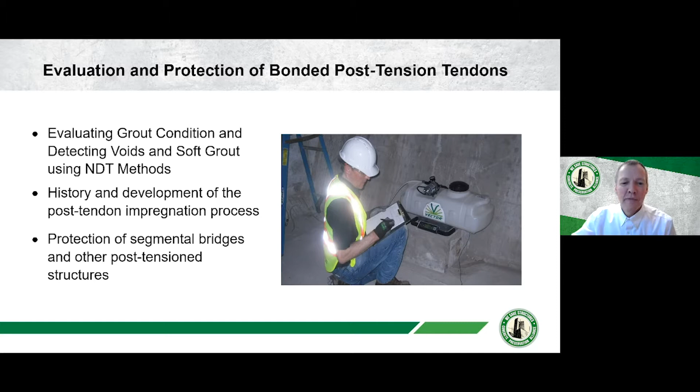Anyway, thanks for the introduction, Scott. Thank you everyone for attending the seminar this afternoon. In the 45 or 50 minutes that we have available to us, my objective is to talk about the evaluation and corrosion protection of bonded post-tension tendons.

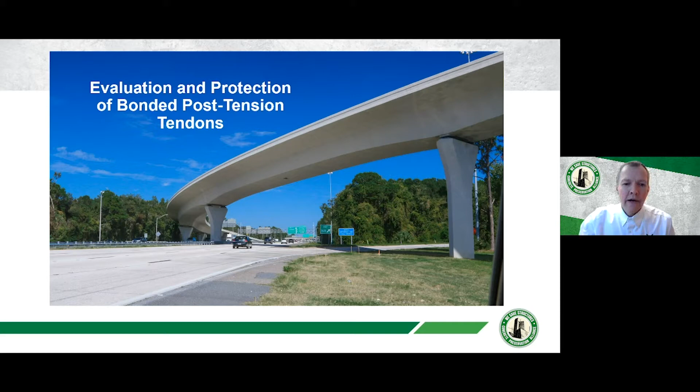I thought I'd start by just showing you a picture of a highway interchange. This happens to be in Tampa, Florida, the I-4 connector interchange. In this photograph, you see 8 or 9 post-tensioned bridges, all as part of the same junction. Post-tension bridges are a very major and important part of our infrastructure and of the bridge network that we have around us.

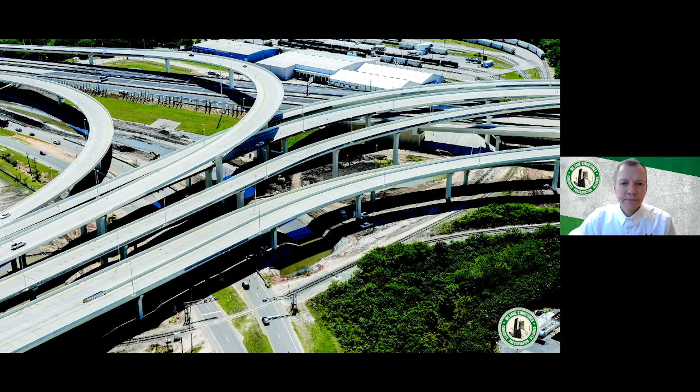Post-tensioning started a number of years ago. A man named Eugene Freyssinet first proposed the use of post-tensioning in 1928. He did a number of experiments and worked on building elements and some beams. But by 1941, the first post-tension bridge was built, and it was built in France.

After the Second World War, there was an increase in popularity of post-tensioning, and part of that was driven by the steel shortage that existed. Post-tension structures more efficiently use the steel that's in them, and that was one thing that helped drive its use.

The first post-tension bridge in the United States was built between 1949 and 1951. It's in the Philadelphia area. The bridge has been rehabilitated, but it still exists today, and overall these structures have been very durable and have served their purpose very, very well.

Post-tension bridges are structurally efficient, and post-tensioning has made long-span bridges more practical and, I would say, generally more economical than they were before.

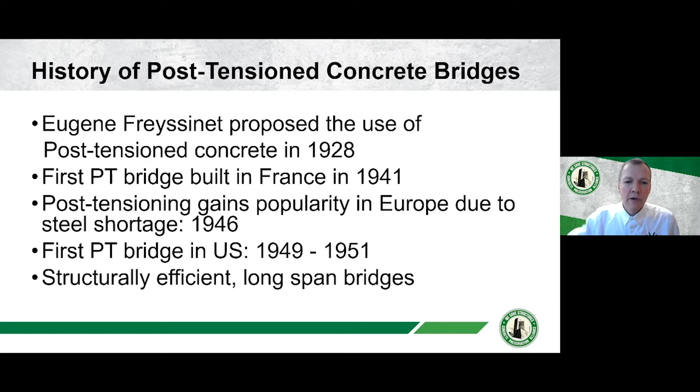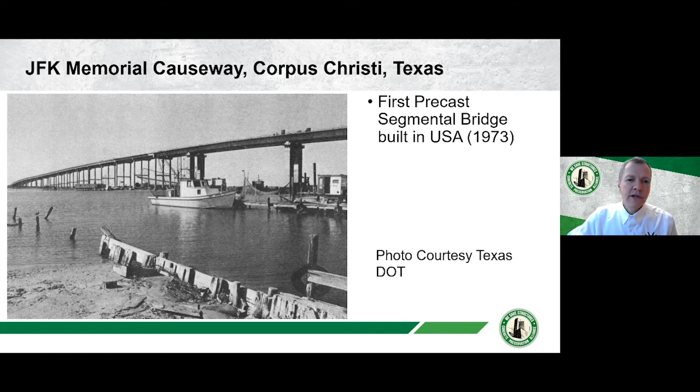One specific type of post-tension bridge that is quite common, and you'll see in a few of the case studies, are segmental, precast segmental bridges. The first one of these built in the United States was built in Texas by Texas DOT in 1973 in Corpus Christi, as you can see here. And that bridge is still in service as well.

I had the privilege of being able to inspect that bridge along with the then chief bridge engineer for Texas DOT, and generally this is in really good condition. It has one kind of issue, a detail that they probably didn't know about at the time when they built the bridge: the end anchorages for the post-tensioning actually come up and end in the deck slab, so the anchorages are somewhat sensitive to getting contaminated with water, because the anchor pockets end in the deck. Other than that one issue, the structure has served its purpose very well and has been in good condition.

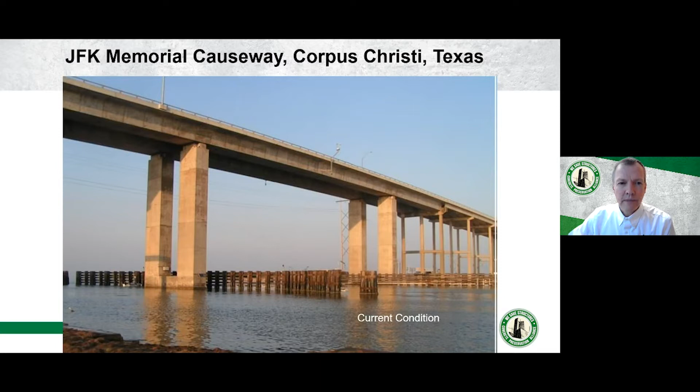Now, if we talk about the durability of grouted post-tension structures, corrosion and durability really come down to the quality and uniformity of the grouting. If the tendons are well grouted without any voids and the quality of the grout is what it should be, you very rarely will see any corrosion issues.

The photograph that you see in this slide—an opening has been made in the side of the concrete to expose the duct. You can see the metal duct has been opened, and inside it the grout has been removed to expose a couple of strands in this tendon. You can see that the strands are in good condition. They've been embedded in good quality grout, and there's no sign of any corrosion activity. This is what ideally we would like to see everywhere.

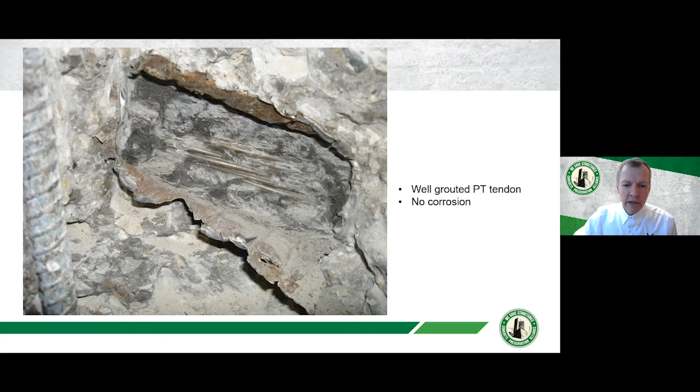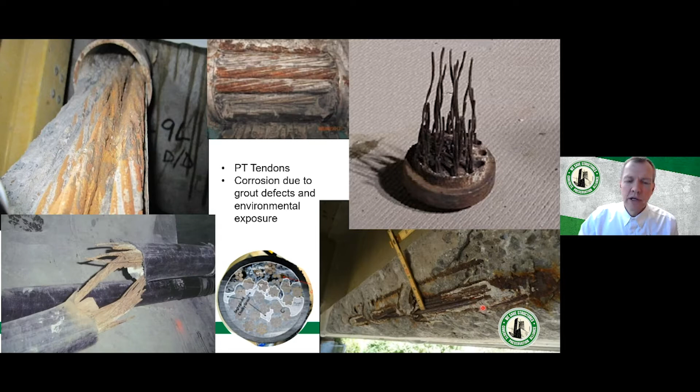In the bottom right-hand corner, we have an example of a structure that is exposed to chlorides in the environment. This one happens to be a Pennsylvania DOT bridge, and chlorides have soaked through the concrete, gotten down to the metal duct. They've corroded the metal duct entirely, and you can see that the strands inside of the duct are now corroding.

There are many reasons why you can end up with issues that result in corrosion, but I'm going to just touch on the two most common ones.

The most common, in my experience, is the presence of voids. If you have a void in your grout, then you have a location where the steel may not be protected. You have a location where water can collect, and even worse, salt water can collect, and you can have severe damage and corrosion in the areas where you have voids.

One of the common things that leads to voids is what is referred to as bleed. If you have a standard cement water grout, in order to make it pumpable, you actually have more water in the mix than what is required to cure the cement. The result is that after the cement grout is pumped, some of the excess water will essentially float or bleed to the top, and this will end up leaving a void after it either evaporates or is absorbed into the remainder of the grout.

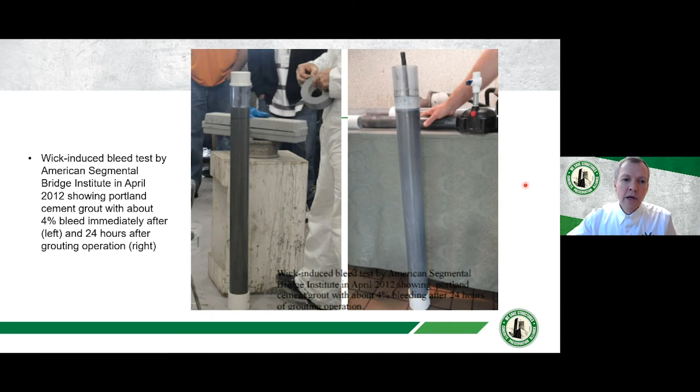So this is one issue that can lead to problems: voids. Another issue that definitely can lead to problems is if you have segregation, or sometimes, in extreme cases, what's referred to as soft grout.

A lot of agencies have moved from using cement water grout to using prepackaged grouts. These grouts have additives to prevent bleed or to greatly limit it, and that's good. But if you add too much water to those mixes, or in some cases the bags are a little bit old, you can have segregation occurring.

That's simply a separation of the material based on density. You'll have denser material at the bottom of the duct, and the lighter material will float to the top. You may not have any voids at all, but you'll have differences in material properties that can lead to corrosion. Generally, the strands in the good quality grout at the bottom will be protected, and the strands in the lower quality grout that floats will typically corrode.

One of the things that drives that corrosion is that where you have the higher water content grout, you tend to have a concentration of water soluble salts like chlorides and sulfates, and you'll end up having a concentration cell, where the strands with higher sulfate and chloride content will corrode relative to where you have lower concentrations. That's something you should be aware of.

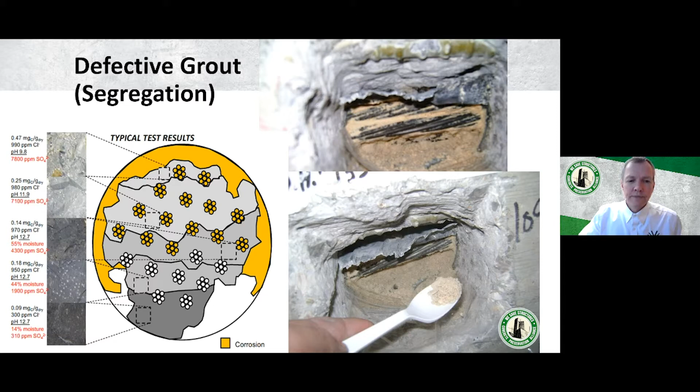This equipment is basically doing impact echo and pulse velocity concurrently. If you move along a tendon assembly, you can pick up where you have voids or defects in the grout. The video here will probably show this a little bit better.

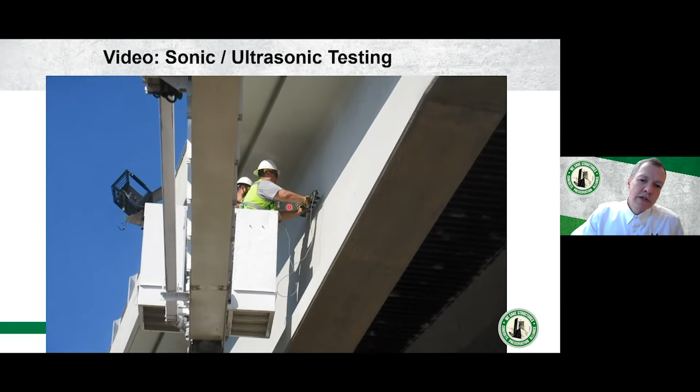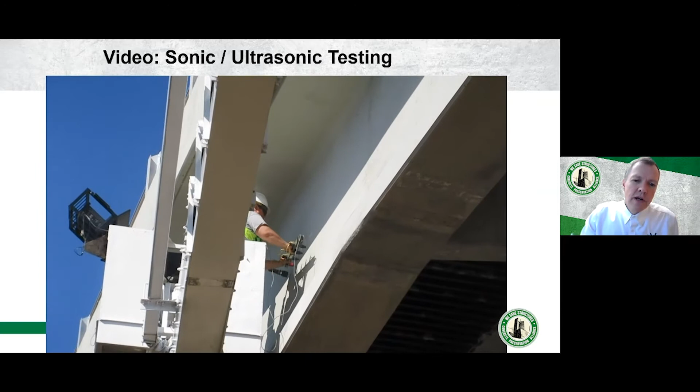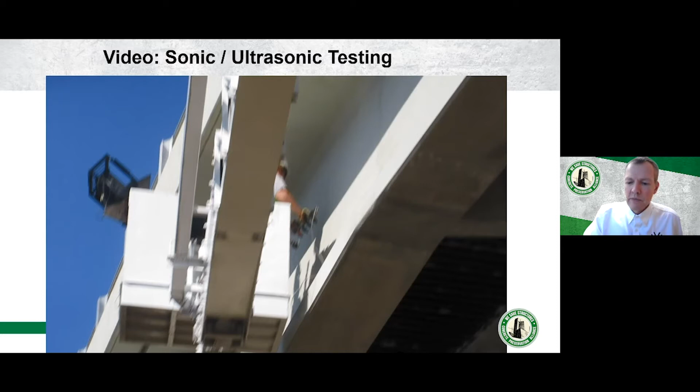So here are a couple of people in a man lift, going along and taking measurements running along the line of the tendon. The person on the left is using an impact device that has a precision impact on the concrete, and the sensors on the right are collecting the impulse response from that impact along the line. If you move along the tendon in this way, you can pick up very easily where you've got problems and where it does not appear like you have any.

Just an example of that: this is a picture of a bridge. It's a small pedestrian bridge over a section of expressway out on the west coast. The DOT was concerned - they had reviewed the construction records and thought that maybe they had some problems with the grouting on that post-tension pedestrian bridge. The people in the basket here are doing the same testing you just saw in the video, and they identified a couple of areas where there were some big anomalies. Those areas were opened up, and you can see here that in this section there was no grout at all. That was identified using the sonic ultrasonic testing technique and equipment.

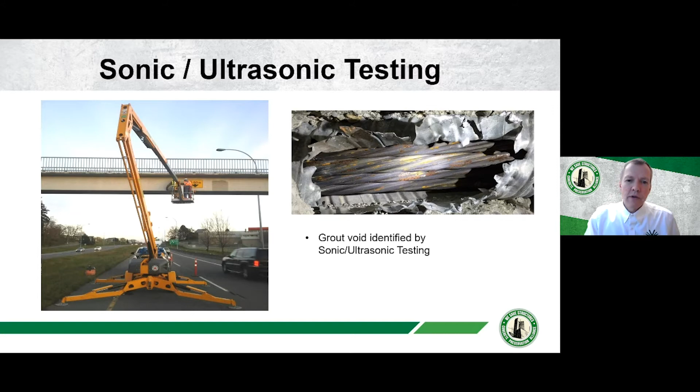So if you identify an anomaly with this equipment, one option is that you can chip the concrete, make an opening, remove the duct, and take a look inside. In some cases that's the appropriate route. In other cases, you might not want to make that big of an opening in the concrete, so you may want to use a borescope.

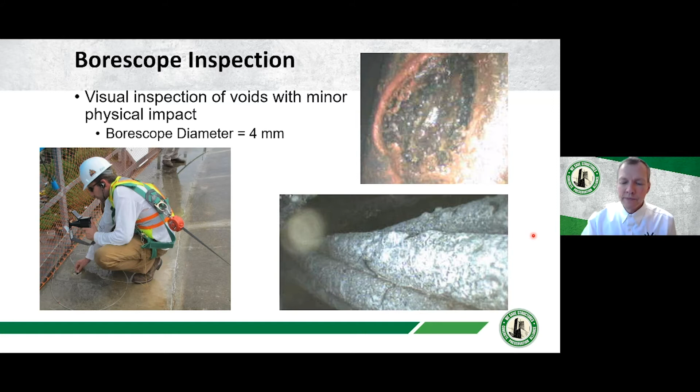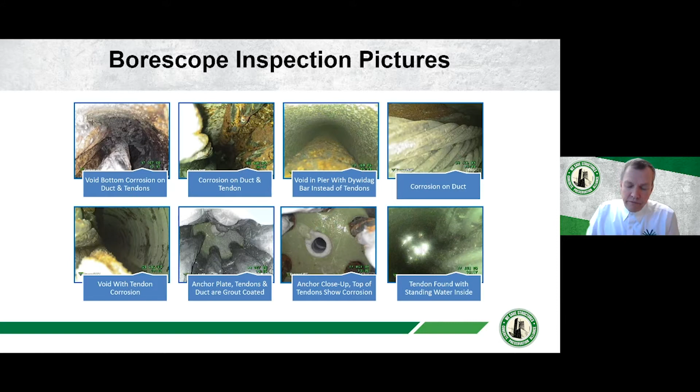Similarly, you can do this on other projects. This is a different project on a different bridge, and you can see different borescope images taken from different defects that were identified - holes drilled in, and then the borescope used to determine the condition of the strands, as well as to get an idea of how big the void is. This gives you a way to verify in the field the non-destructive testing results that you're getting from the sonic ultrasonic techniques. So if that's something you want to do, it's available and certainly possible.

There are cases where you may want to know the condition of the strands themselves. It may be grouted, you may not have any presence of voids, or you may not be aware whether there are or not. There is a technique available using magnetic flux that can be used to determine if you've got broken PT tendons, or more likely broken individual strands or wires.

I'm just going to show you a slide or two from a project that we did on the Sunshine Skyway down in Florida. The post-tension tendons in question here are transverse post-tensioning that's in the deck of the bridge.

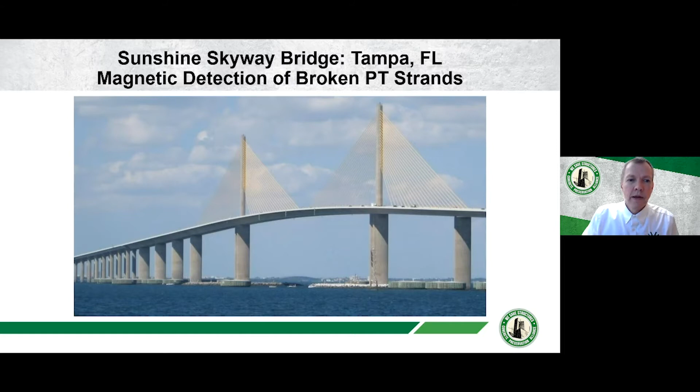The left-hand photograph shows the equipment that was used. Essentially, this is a large electromagnet. You've got one pole of the magnet here, and the other pole over on the other side, and this large magnet creates a magnetic field between the two poles.

When you run this over the concrete surface and over a post-tensioning tendon that runs in the same direction as the magnetic field, you induce a magnetic field response onto the steel. You're magnetizing the steel, so one end becomes magnetized south, like the magnet shown here in the center, and the other end becomes magnetized north, as indicated here.

If there are no breaks, if everything is continuous in the steel, you'll end up with a magnetic field curve that starts either high or low at one end - so high here like south - and comes down smoothly, like an S-curve, all the way to the bottom right.

If the tendon is completely severed, you'll end up with two curves. You'll have south going all the way down to north, then you'll start with a new south, and come back down to north if it's completely broken, as illustrated by the little bar magnet in the middle here. More likely, only a portion of the steel is broken.

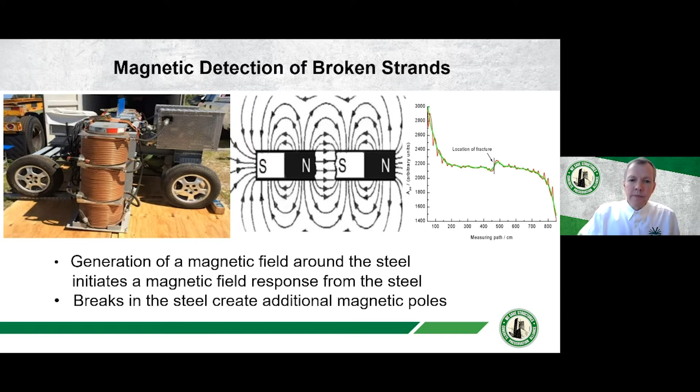Okay, so now I want to talk a little bit about corrosion and techniques that can be used to determine the risk of corrosion activity inside grouted post-tension tendons.

You saw the photo on the left at the beginning of the presentation - it's clearly a situation where there's a void in the grout and exposed steel strands in that voided section. These exposed strands are subject to potential corrosion, and their behavior will be something like what's shown on this graph on the right: the corrosion rate is really low if there's little moisture, then it increases, and once it starts to go, it goes up very, very high.

For a standard temperature condition, you'll get a single curve like this. If you have multiple temperature situations, you'll get multiple curves, but the point of showing this is just to give you the idea.

If the strands are in grout, the grout creates an alkaline environment around the steel. That alkaline environment protects the steel from corrosion, and it doesn't matter whether it's wet or dry - the strands will be protected.

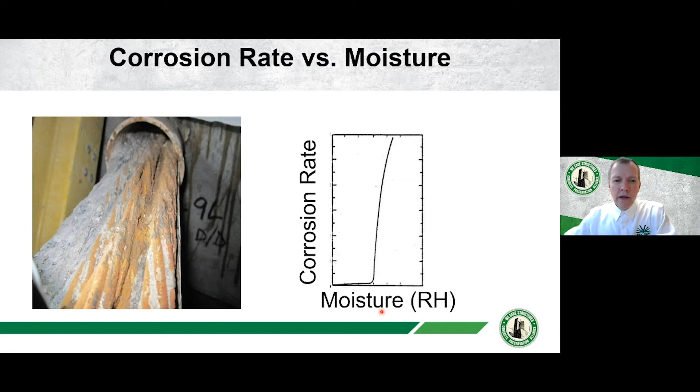Knowing that, we use this relationship in a corrosion evaluation technique we have - we call it PT corrosion evaluation. It's not a very innovative name, but it is a very useful technique.

With this technique, we typically make two openings into the duct. These can be small drilled holes or larger ones, depending on what you want. At one location, which we call the in port, we connect a supply of dry gas along with a flow meter, and push the dry gas in at that location in the tendon.

That pushes an air sample out of the out port, and again using a flow meter, we run that through a sampling or measuring unit to measure the moisture content of the air being pushed out of the tendon assembly.

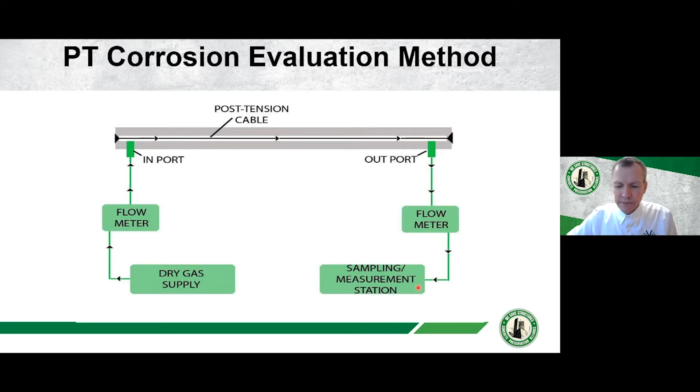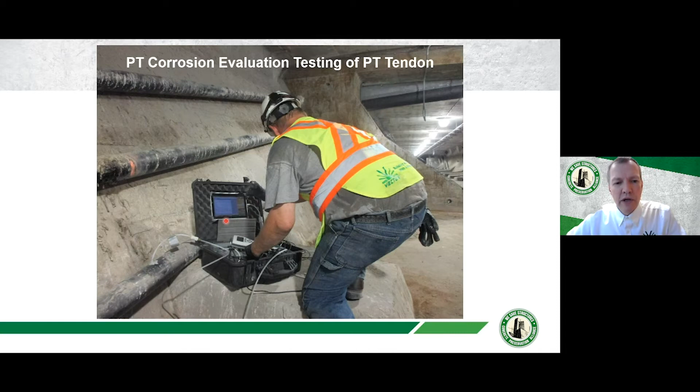This is what it looks like in the field to do this type of measuring. Here you have an external post-tension tendon in a post-tension bridge. Here you can see the outport - it's just a quarter inch diameter, or 6 millimeter diameter, tube that's been installed into the tendon, connected to the measuring equipment. This technician is taking a measurement, and that reading is being recorded and logged in the equipment you see here.

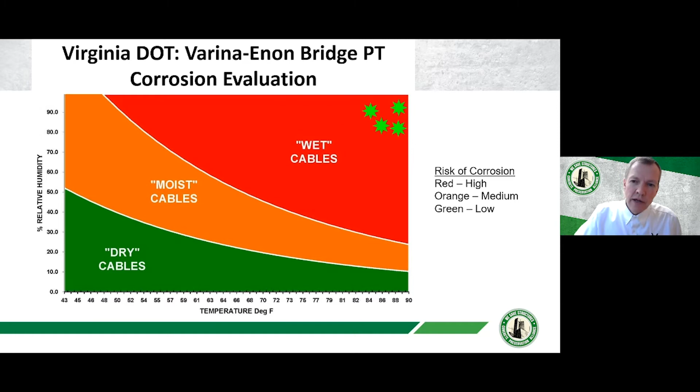So there is a very strong correlation between moisture content and corrosion risk. And if you have wet tendons, one option for reducing the corrosion rate is to dry them out. In the next few slides, I just want to explain the process and show you a couple of pictures from a recent project.

In PT tendon drying, we're using a supply of dry gas. We're pushing it into the structure at some location, either in both directions as illustrated here, or often pushed in at one location and out at another. Either way, you're pumping in dry or desiccated air at a certain location, pushing it through the tendon assembly. It's evaporating or picking up moisture that's in the tendon assembly, and the air venting out is carrying that moisture away. You continue pumping dry air until the moisture content of the air you're pushing out goes below a certain level you wish to have.

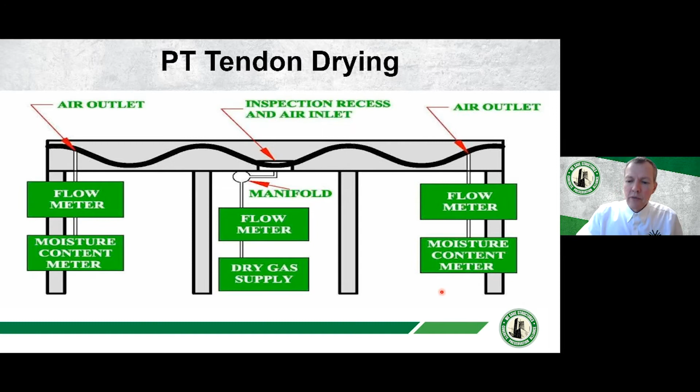This has been done on a number of things. It's a very common technique for unbonded post-tension tendons as well, but in terms of bonded or grouted post-tension tendons, this is an example where it was done recently on a Florida DOT bridge, and the tendons are inside the girders of this bridge.

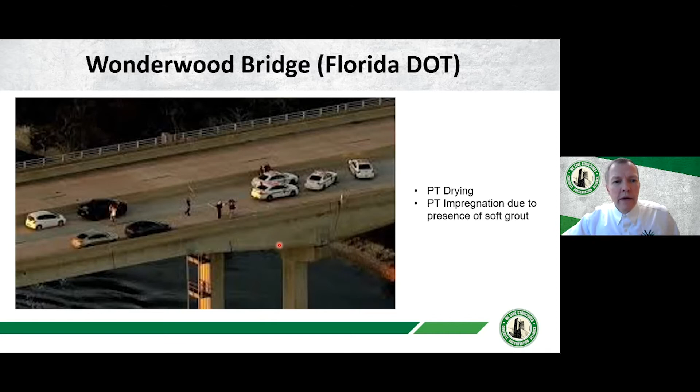If you're going to pump dry or desiccated air through the tendons, this is going to take a period of time, and from a cost-effective point of view, you're not going to do this with a bottle or a few bottles of compressed air or nitrogen. Generally what you'll set up on site is a dry air plant, consisting of a compressor, moisture separator, and then generally 2 types of dryers or desiccant dryers, getting the moisture content or dew point of the air down to usually around -30 at minimum, probably around -40 dew point. Effectively you're going to have air that's completely dry. That air is piped out to the structure, typically split into a number of different tubes, and then injected into the tendons.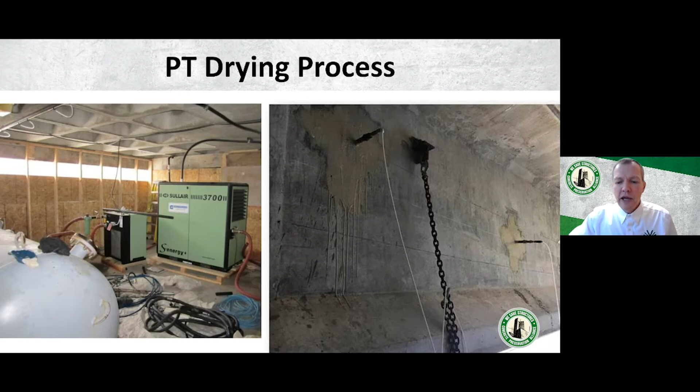You can see a tube going into one tendon, connected to a different tendon down here. You pump dry air in at certain locations, and it vents out at other locations. At the vent locations, you can manually measure moisture content, or as illustrated here, use an automated system to monitor the moisture content of the exhaust air throughout the process. You continue drying until you get the exhaust air down to the level of dryness you wish to achieve.

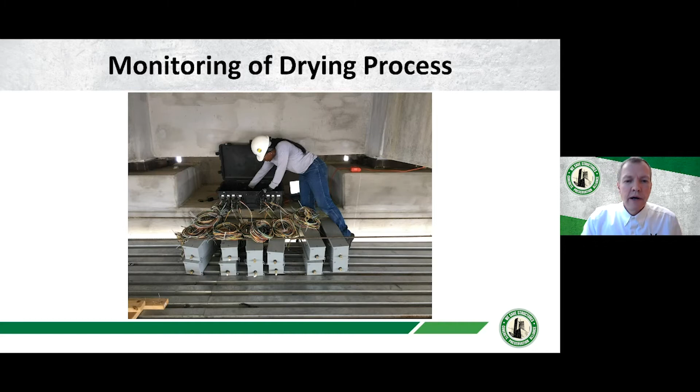So if your problem is simply moisture, you can do drying. If you want to provide protection beyond that, you may want to consider something else, or something in addition. One thing sometimes done in conjunction with drying, or instead of drying, is a process called impregnation.

This is a corrosion protection process for grouted post-tension tendons. Generally these are tendons which have either voids or some type of defective grout. It could be used to provide additional protection to tendons without those deficiencies, but generally this has been used on tendons identified as having these deficiencies.

The impregnation material is transported inside the strands, and it treats the full length of the tendon. I'll explain in a couple of slides exactly how that's done.

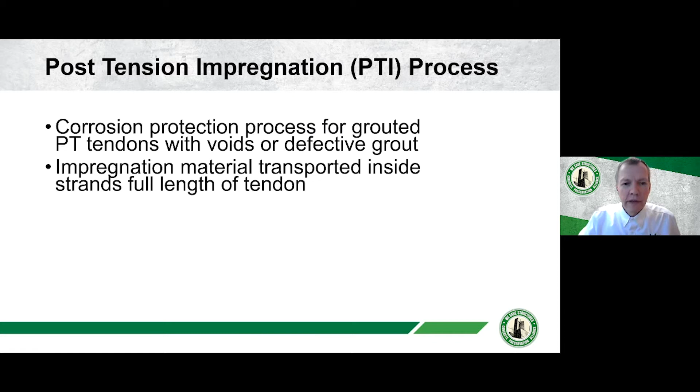The impregnation material reduces corrosion by two mechanisms. The first is that in locations where you have voids and exposed steel, the material will form a coating or film on the exposed steel surfaces. This means exposed steel in voids, but also the internal surfaces of the strands themselves, where corrosion can also be an issue.

The second mechanism is that the material soaks into the grout surrounding the tendon or strand, and by doing so improves the corrosion resistance of the grout. It increases the resistivity of the grout and also makes the grout more hydrophobic, keeping water effectively away from the strands.

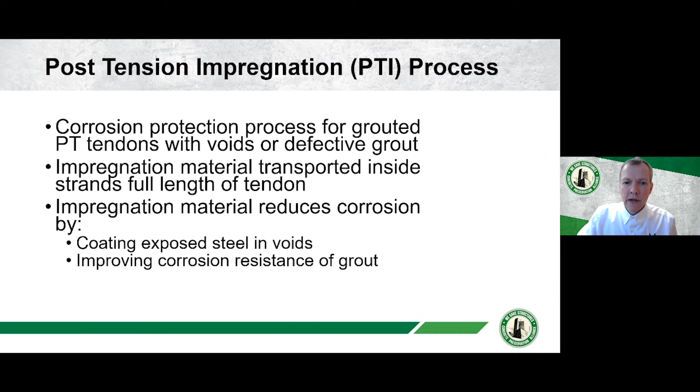Schematically, if the end of the tendon is available, that's a very easy and convenient way to do this. You basically make a connection to the end, pump the material from one end of the tendon, and it travels inside the strands themselves through to the other end of the post-tensioning tendon. As it travels along, the material also seeps between the wires and into the surrounding grout. So conceptually, that's what happens if you have the ends of the tendons available.

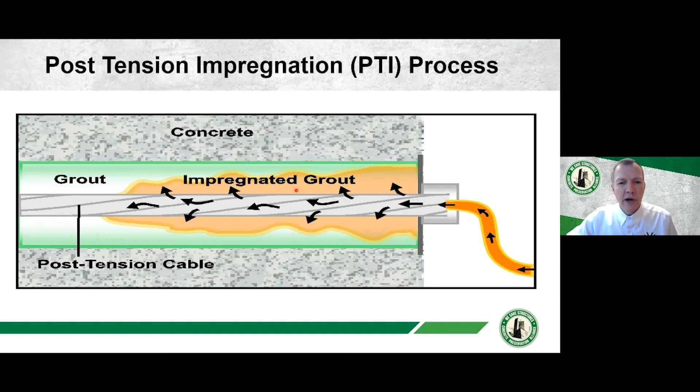If the end of the tendon isn't available, you'll typically do this work from some intermediate location through a port, and the material is introduced there. In these situations, the material generally goes both ways from the intermediate port. Again, the principal transport mechanism is inside the strands themselves, and then from there it soaks between the wires into the surrounding grout.

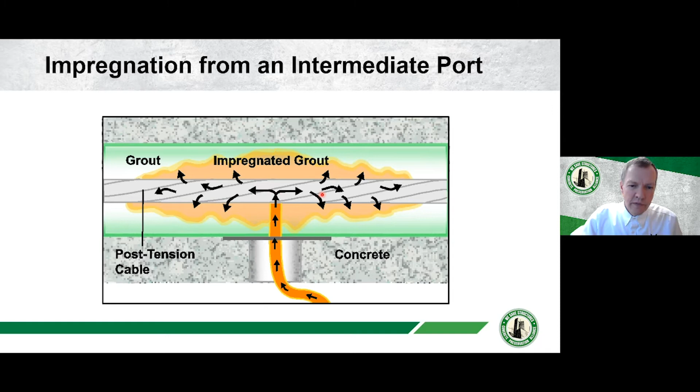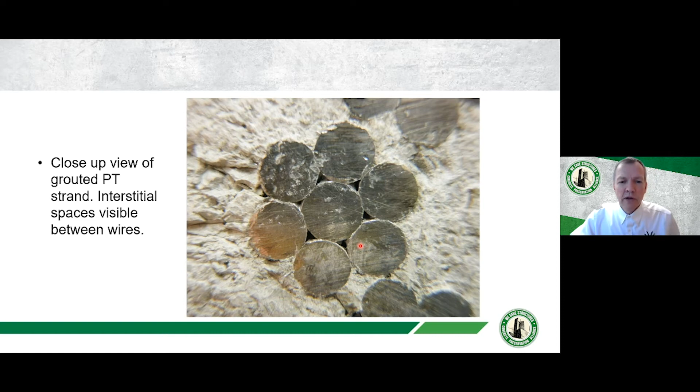If we take a close-up view of the end of one of those strands, you'll see we have 6 outer wires and an inner king wire. In between the wires, we have what we refer to as interstitial spaces—effectively longitudinal capillaries that run the full length of the tendon. That's where the material is primarily traveling, along the length of these capillaries.

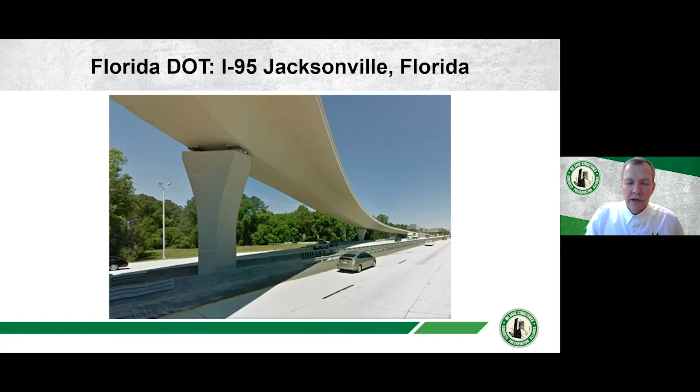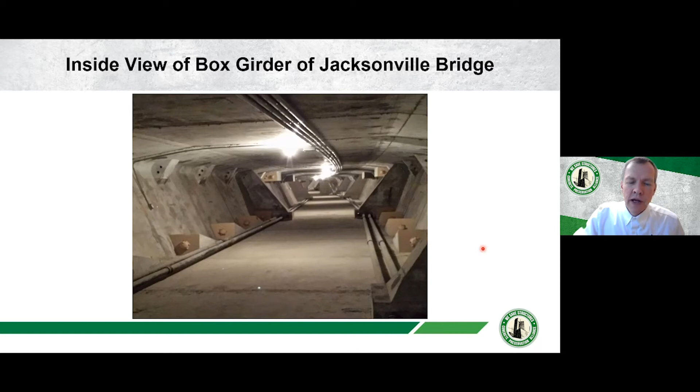Just to give you a few examples, this is a bridge down in Florida—a beautiful segmental post-tension bridge. It has had a few tendons that were not properly grouted, and you can see there are some external tendons and also some internal tendons in this structure. But the ends of the tendons here are readily accessible.

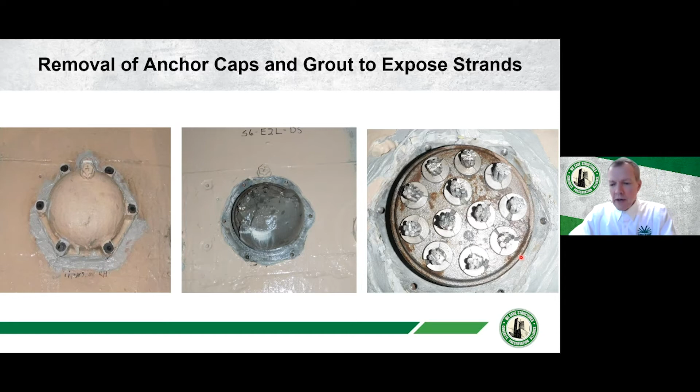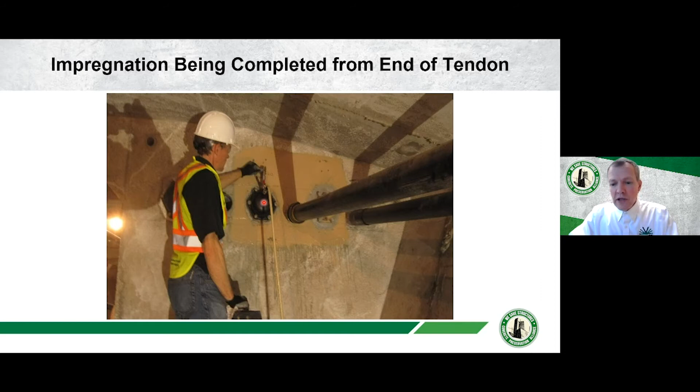There are plastic end caps, and if you have this condition, a simple way to do this is to remove the plastic or metal end cap, expose the grout, remove the grout, expose the end of the anchorage and the end of the strands, put the cap back on, connect a hose to the grouting port, fill the cap with the impregnation material, pressurize it, and then go to the other end of the tendon where you've done the same removal and cleaning, and just wait until the material begins to appear there.

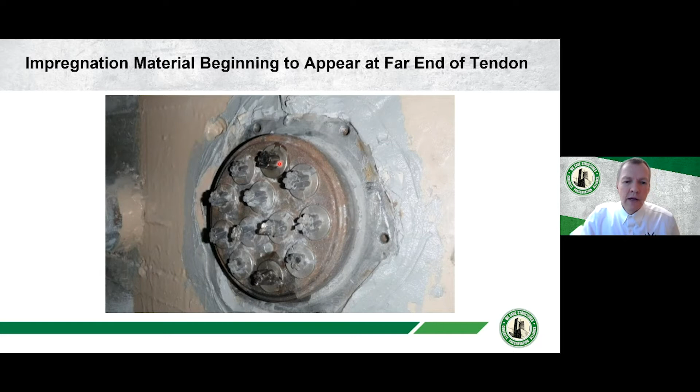And here you can see the material starting to seep out of one strand down here and another strand up here. Continue to wait. And the tendon on the left, I don't think material is coming out of these two strands at the time when the photo was taken, but you continue to wait until the material is visibly coming out of all of the strands at the other end. It's very obvious visually when that's happening and when it's not.

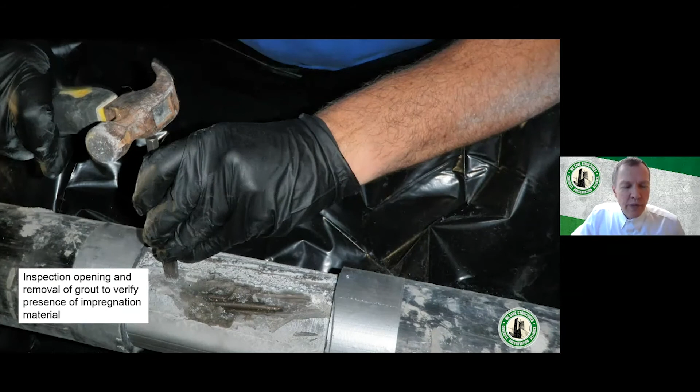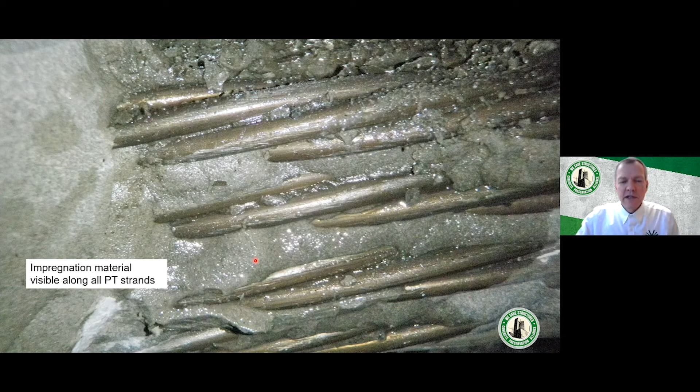That project I just showed you was actually the first full-scale field project that we did for Florida DOT, and they hired an outside consultant to do some quality control inspection. They made some openings in the ducts, 24 of them in the first tendons we did, and removed the duct and carefully removed the grout to verify that the impregnation material was in and around the strands, which you can see in this photograph. They continued the removal all the way around the perimeter and visually verified that the material was present there. They put the duct sections back, regrouted it, and they've never done that again. Obviously those tendons were pumped from one end to the other, but they just wanted to see what was happening at midpoint locations.

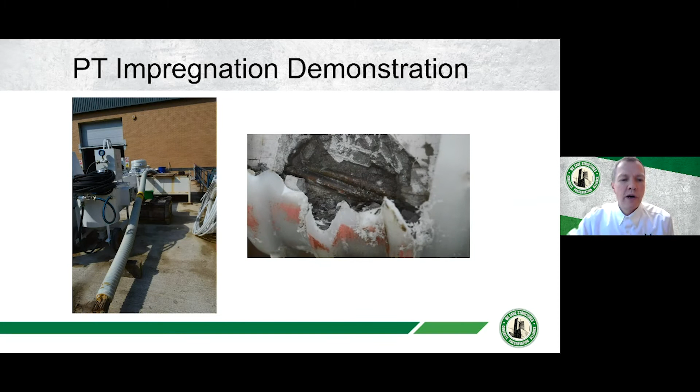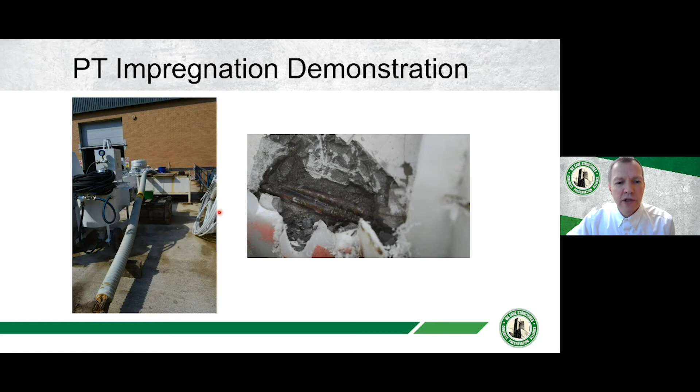In this picture, this is a video from a demo done in the UK. A grouting contractor or PT contractor there had built a tendon mock-up for a grouting verification, and we used that mock-up for doing impregnation. You can see the material, this is an opening somewhere along the length. The material was seeping out from between the wires, and at the end of the tendon you can see the material coming out the end and dripping down, even squirting out a bit. This is only a 10 or 12 meter long length, about 40 or 50 feet, and you can see the flow rate through that tendon is fairly high.

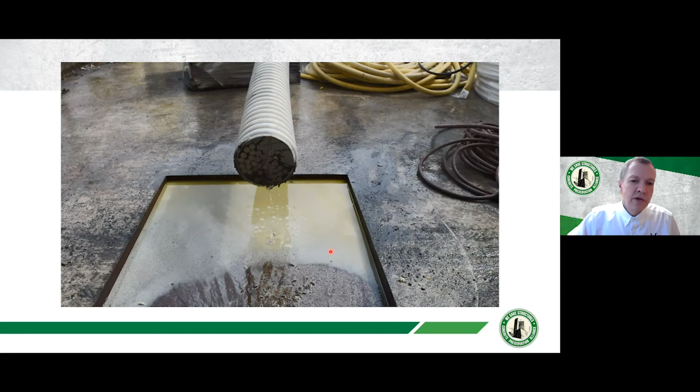In a full length tendon in a bridge, where it might be 200 or 300 feet long or possibly even more, it's still going to flow like this, but just slower because of the longer length.

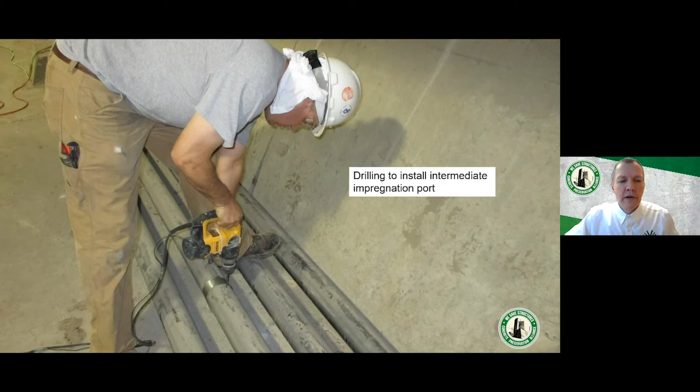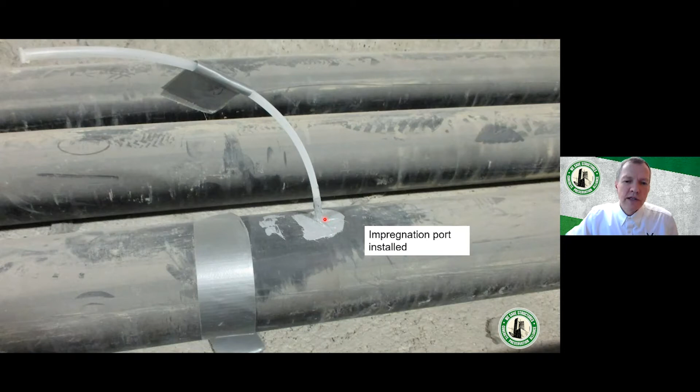The previous two examples showed situations where the tendons were being impregnated from the end. This is one example I wanted to show where intermediate ports were used. Here you can see the technician drilling a port, a 6 millimeter or 1/4 inch diameter drilled hole. We're using special equipment so it doesn't cause any damage to the strands. Here you can see the port installed into the duct, and here's the pump assembly, pumping material from a reservoir down this hose to an intermediate location, and from that location it's pushing the material in both directions.

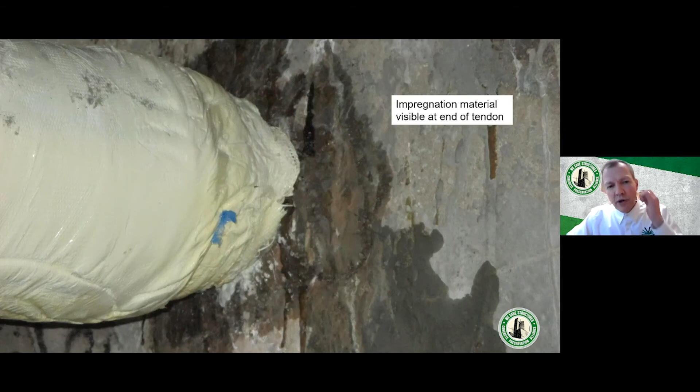When you're pumping from an intermediate location, typically you pump until the material is visibly present at one or both ends. Usually what you'll see is at the end of the duct where it goes into the diaphragm wall, material starting to come out of small cracks in the concrete diaphragm wall. That's one sign the material is there. The other sign is that if you've got a concrete pour back on the other side of the diaphragm, you may see signs of it leaking out around cracks between the pour back and the concrete segment itself. In these cases, the work was done from an intermediate location because the cost and time of removing all the concrete pour back to expose the anchorages was considered prohibitive.

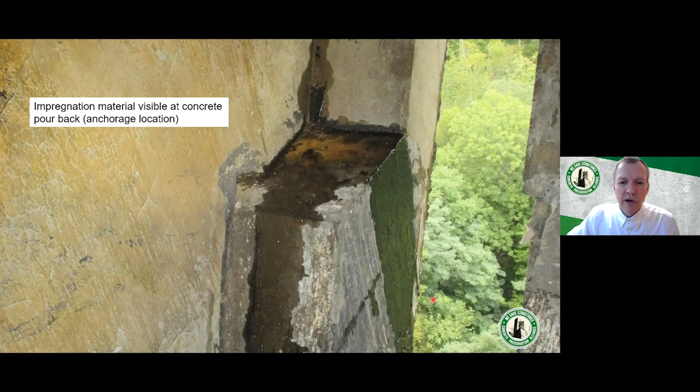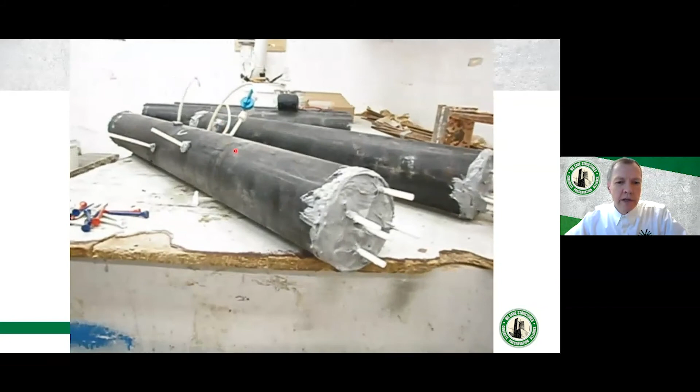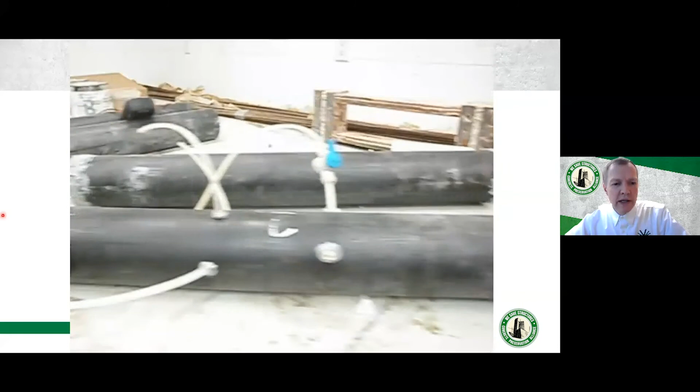Here you can see just one little video from a mock-up: a tendon section with a 1/4 inch diameter, or 6 millimeter, drilled hole in from the side. The valve's opened and you can see the material running out a strand that's running more or less in line with where it's being injected or impregnated. It runs pretty easily lengthwise along a strand once it gets inside.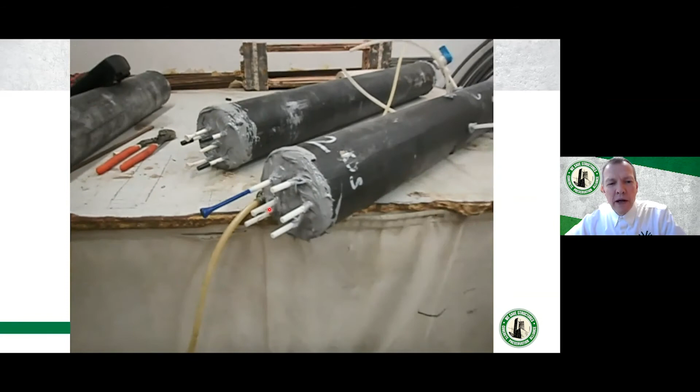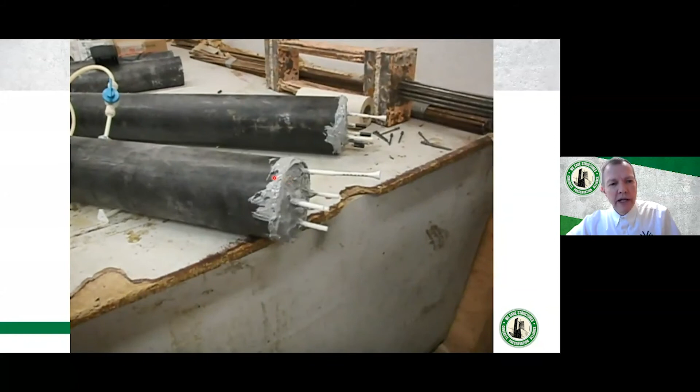Here we're plugging the end of it with a very sophisticated plug to build up some back pressure. This would be typical of what happens when you have a longer length of tendon. When you do that, instead of just running freely along the one strand that is clearly in, you'll notice that it starts to move transversely across the section.

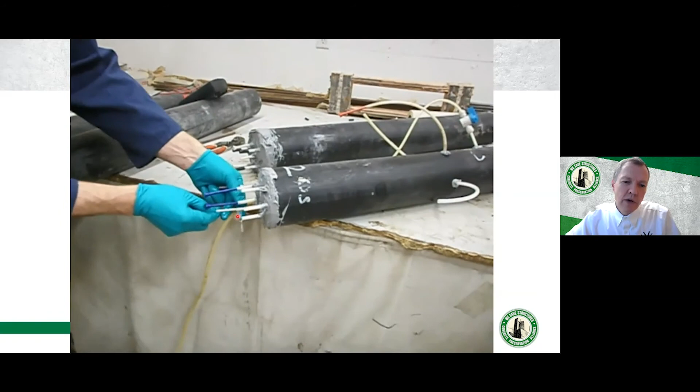So here you can see it's moved 15 or 20 degrees radially around the section. And from the end, you can see it's now coming out below where it was coming before. It's coming out this strand up here and up to the right, and now it's coming out another one down below. Basically it's moving across the section.

The quality of the video here is not the greatest, but you get the idea. Now you can see it's coming out the bottom right-hand one, it's coming out the top right-hand one, and the last one for it to start coming is this one here. And there it goes - it's coming out diagonally opposite from where it's basically being pumped in.

So you can see that the material can travel lengthwise inside the strands, but it also can travel laterally from strand to strand, and that's quite common to see. So that, I think, visually shows you that you can get material into the tendons.

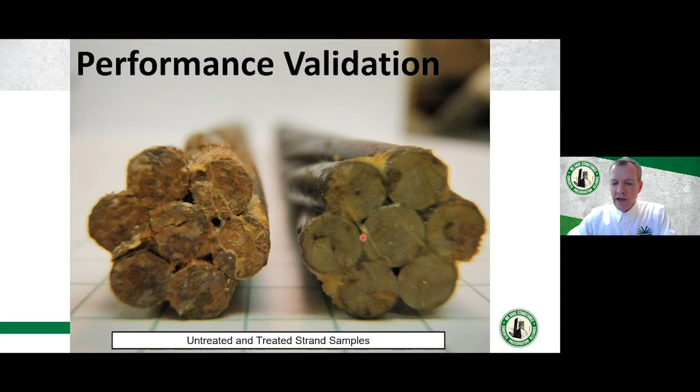If you want more quantitative testing, you generally have to go with either galvanostatic or potentiostatic testing. In a laboratory setting, that generally means making standardized samples with a standard piece of strand, so everything is controlled - the position, the size of the strand, the length of it. That strand is connected to a potentiostat, which is connected to a counter electrode as well as a reference electrode in the cell. You apply either a current if you're doing galvanostatic testing, or a potential or voltage if you're doing potentiostatic testing, and you can compare the corrosion resistance of different things very easily using these techniques.

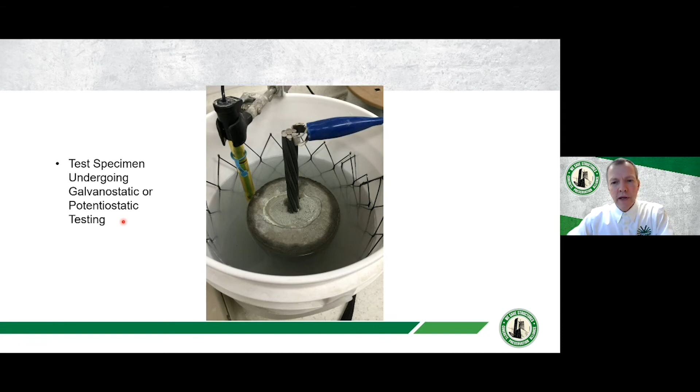So just to not bore you with details - if you want any more information on any of this, feel free to let me know or send me an email after the presentation here.

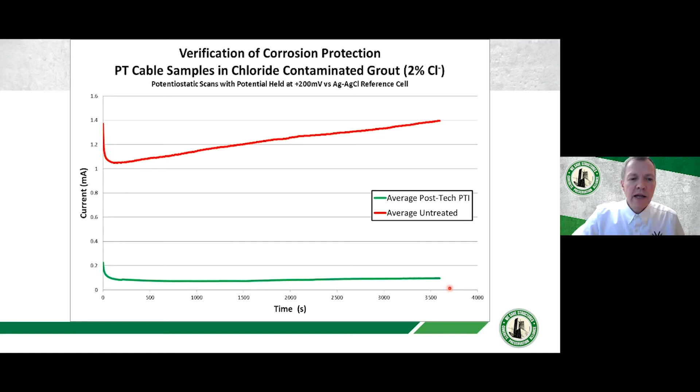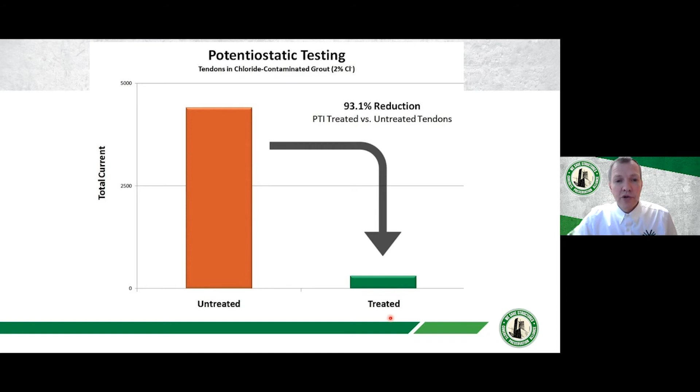You can summarize these charts by calculating the area under each of those curves, and from that you can basically get the total current or total charge passed. You can compare the untreated samples to the treated samples, and you can see there's a big reduction by doing the treatment on chloride contaminated samples in this case.

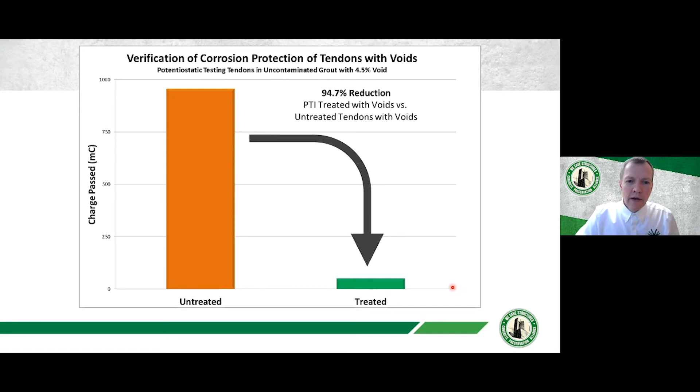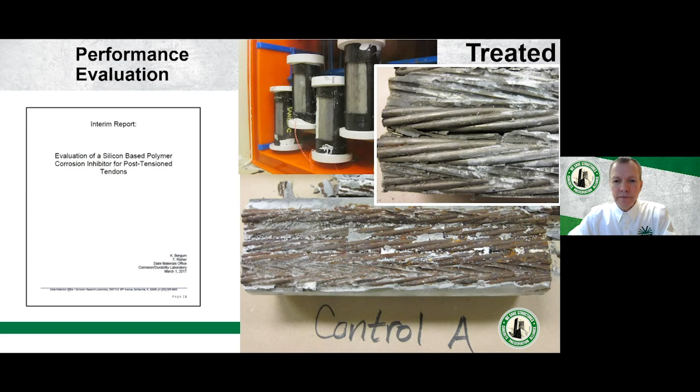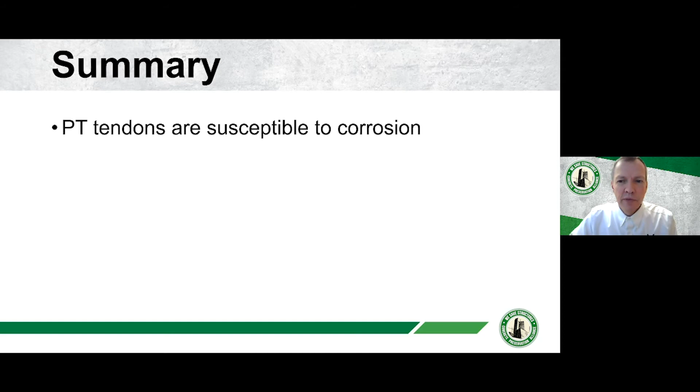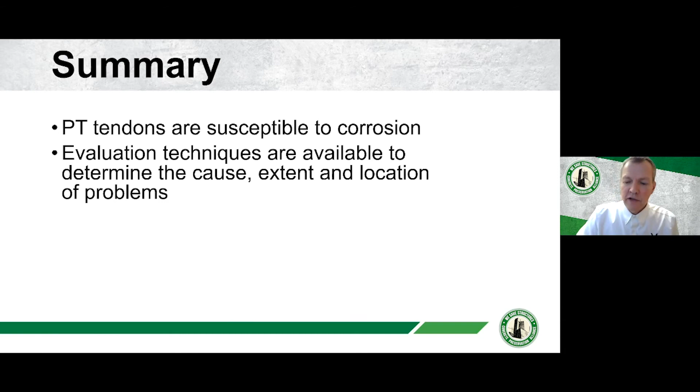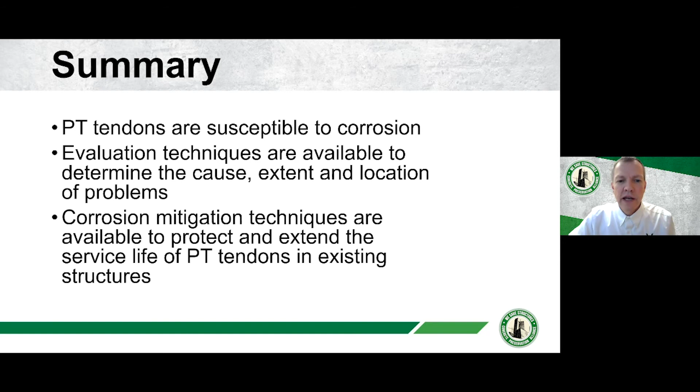So just to wrap up, we've talked about a number of different things, but I think there are 3 main points to conclude. First, post-tension tendons are susceptible to corrosion. Second, there are evaluation techniques available to determine the cause, extent, and location of problems — the two most common being the presence of voids in the grouting or defective grout. Third, there are corrosion mitigation techniques available to protect and extend the service life of grouted post-tension tendons in existing structures.